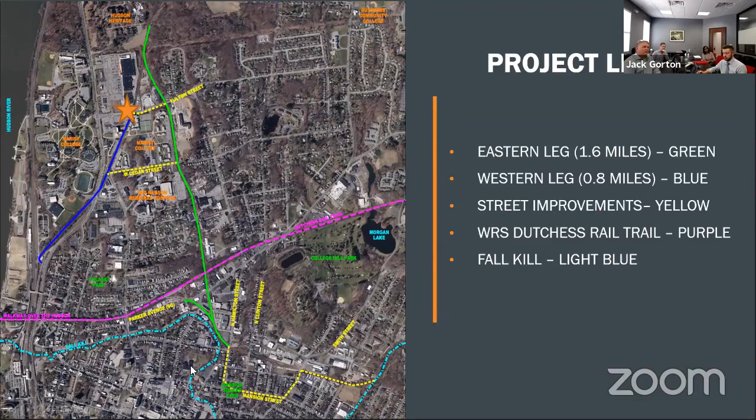To facilitate connectivity and create a more complete trail network, we're proposing on-street improvements along Fulton Street and Cedar Street, shown here with the dashed yellow lines. Lastly, we'll be installing wayfinding and ADA improvements throughout the northern portion of the city to direct users to the trail, also indicated with the yellow dashed line on the drawing.

As we expect this trail to be more than just a recreational facility, we anticipate heavy demand. In order to provide adequate space for potential users, we're proposing several robust trail cross sections. In the areas expected to have the most use, we're planning a split use trail — this top drawing here.

This will have distinct separated facilities for bicyclists and pedestrians, separated by a colored and/or textured median. The pedestrians will be accommodated on an 8-foot wide pedestrian pathway alongside a 10-foot wide bicycle path. The 4-foot median will be flush to provide opportunities for crossover between the paths and extra usable width, but will help define the pathways and also house the lighting mentioned earlier.

Where we expect demand to be less and we don't have adequate width available, we're planning a 16-foot wide shared use trail — that's this one in the middle. In this scenario, bicyclists and pedestrians will share the trail, similar to most trails found throughout the Hudson Valley. However, to accommodate the expected demand, this trail will be wider than most at 16 feet wide. The Dutchess Rail Trail, for reference, is 13 feet wide, so this is a nice wide section.

Lastly, we're proposing a roadside trail along West Cedar Street and Fulton Street. In this scenario, a 10-foot wide shared use trail will follow the roadway, offset from the road with a 5-foot grass buffer. The buffer will provide pedestrians and bicyclists separation from vehicles on the road, improving safety and comfort for trail users.

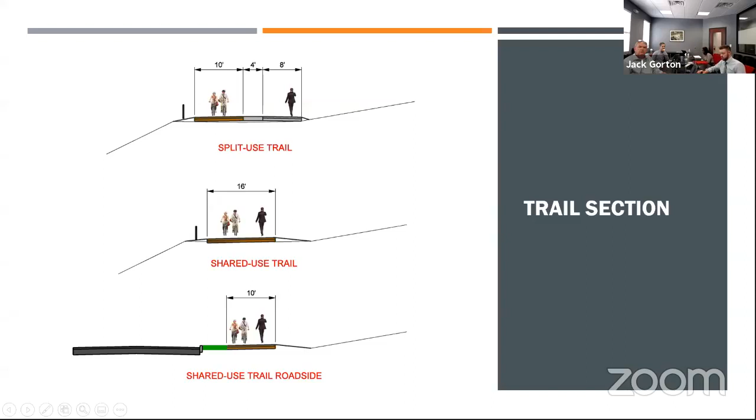This is a simple rendering of how the split use trail could look cutting through the Marist campus. Notice the distinct facilities for bicyclists and pedestrians, separated by this colored median. As noted earlier, the lighting will be accommodated in the median to adequately illuminate both facilities.

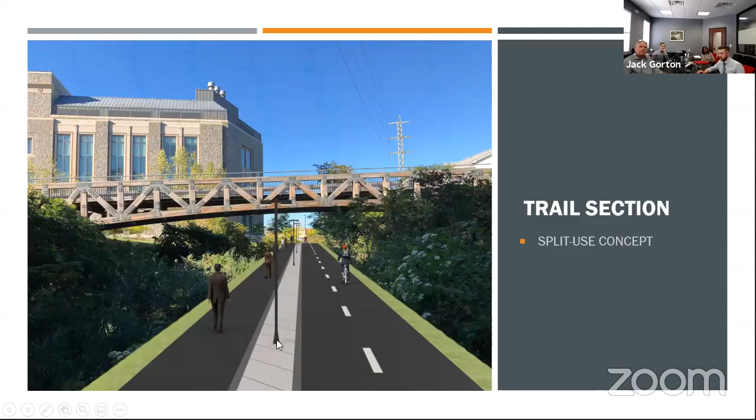The shared use trail section will look similar to the Dutchess Rail Trail, just with a wider asphalt section. A key distinction from the Dutchess Rail Trail is the lighting that will run next to the trail in the shoulder areas, as there will not be a median to house the lighting.

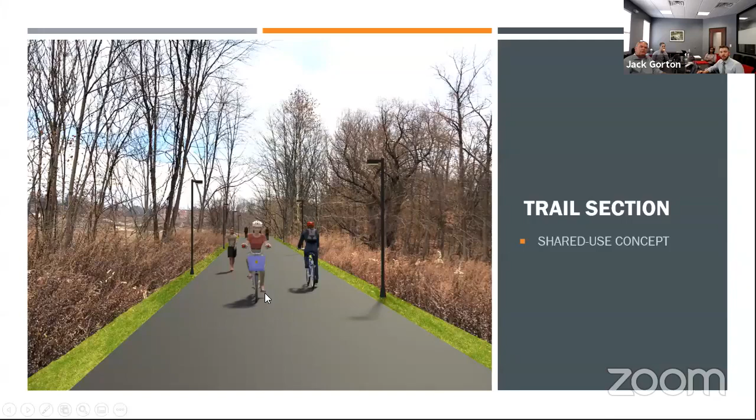One critical design element of all trail projects revolves around roadway crossings. This trail will create new conflict points between pedestrians, bicyclists, and motorists, as the corridor crosses several streets with varying characteristics. We'll be designing a crossing appropriate for each roadway depending on its characteristics. At a minimum, high visibility crosswalks and signage will be installed.

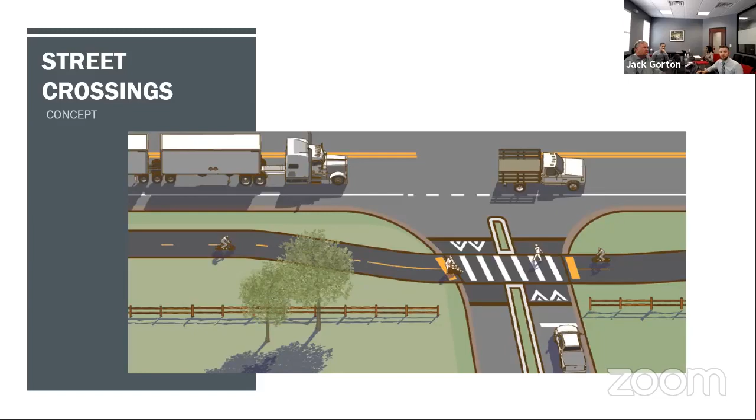These are examples of different crossings that have been implemented in different trails throughout the country. These techniques may be appropriate at different areas throughout the corridor.

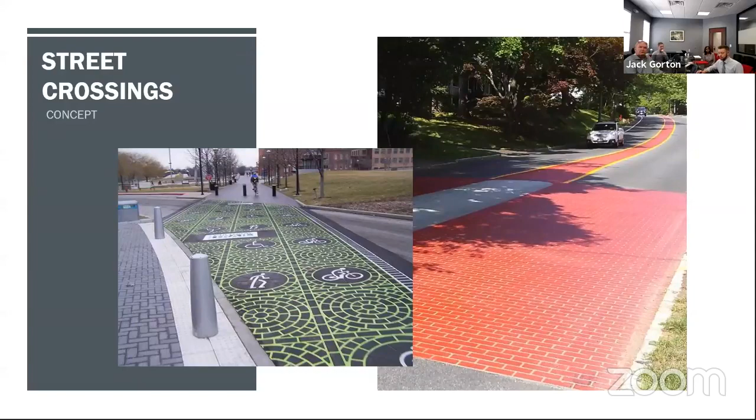One crossing in particular has been identified that warrants a grade separation, where the eastern leg crosses Fulton Street. Fulton Street carries over 10,000 vehicles per day, and with downhill grades, vehicles are often traveling at higher speeds. The eastern leg unfortunately crosses Fulton at a location with poor sight lines, so the trail is proposed to be ramped up and cross over Fulton Street via a bridge.

The bridge proposed for this crossing is the historic truss shown in this top photo. This is a bridge the county removed from one of their roadways over Metro North tracks in Dover several years ago. They have since been looking for an appropriate home for the historic structure and are proposing to install it here as an adaptive reuse. This render shows a simple graphic of what Fulton Street may look like with the bridge crossing overhead.

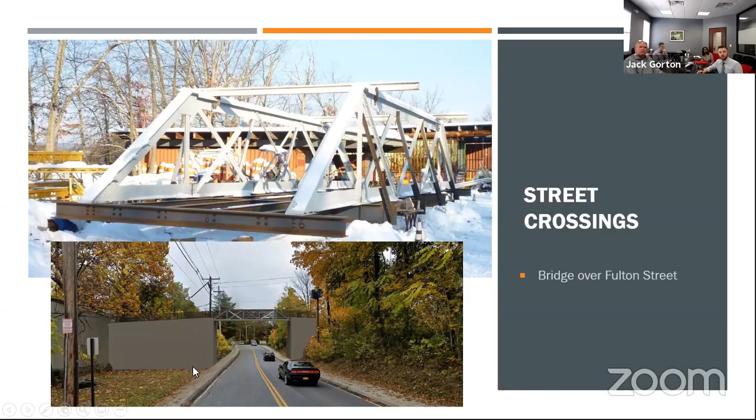Brendan mentioned our emergency response committee earlier. We have been working with emergency services to evaluate the use of cameras at strategic locations and ensuring that sufficient access points are installed.

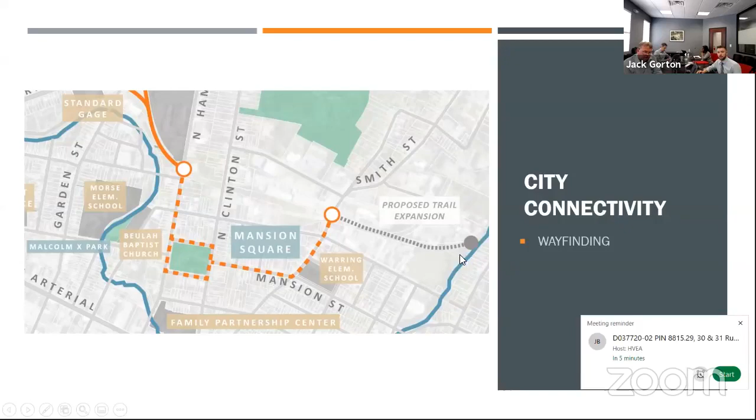The project will install wayfinding and ADA improvements in the northern portion of the city to route residents to the trail network through an accessible route. There's also potential for a future expansion to the east to connect to a potential trail along the Fallkill, if that's developed in the future.

Now I'd like to take a few minutes to walk through the corridor and highlight some key areas and connections. I'm going to start at the southern end of the trail at Hamilton Street and work my way north along the eastern leg to Hudson Heritage. I'll then circle back and we'll review the western leg starting at the north side of Fulton Street and head south towards Kittredge Place.

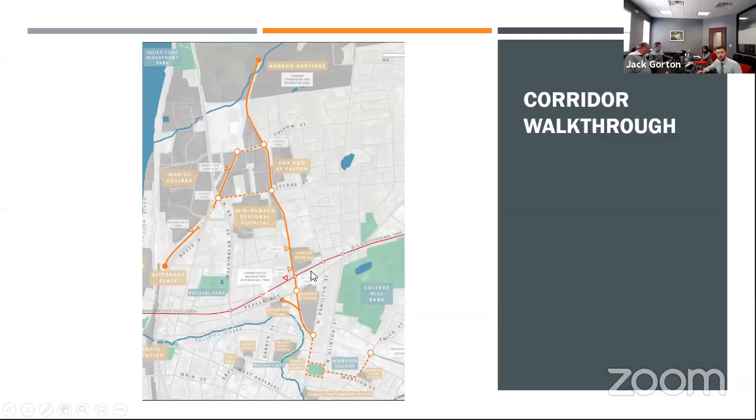The trail will begin here at North Hamilton Street, just south of the County Justice Center. This segment will be the split-use trail, indicated with the blue and yellow lines along the corridor.

Right at the beginning of the trail, we have a unique opportunity for green space and/or a pocket park, as the trail corridor directly abuts the Fallkill right here. So this area will be looked at to be enhanced for public space.

The trail then heads north past the Justice Center, where we encounter the Parker Avenue location. Parker Avenue is going to be a major decision point along the corridor. Here we are closely located to the Dutchess Rail Trail, the Walkway Over the Hudson, and a property that Scenic Hudson purchased and has plans to create community space.

The trail will take advantage of the development in this area and then create a spur that will head to the Walkway Over the Hudson and the community space that Scenic Hudson will be working on.

Parker Avenue will be improved through the installation of a flush median, similar to one of the photos I showed earlier. This will create a boulevard effect on Parker Avenue, slow vehicle speeds, and enhance safety for pedestrians and bicyclists crossing at two locations in the corridor.

The trail will then head north and cross underneath the Dutchess Rail Trail, which is carried by a bridge that crosses over this former rail line here. To provide direct access, an ADA-compliant ramp will be installed to the east to provide access to the Walkway Over the Hudson, and to provide access to points east.

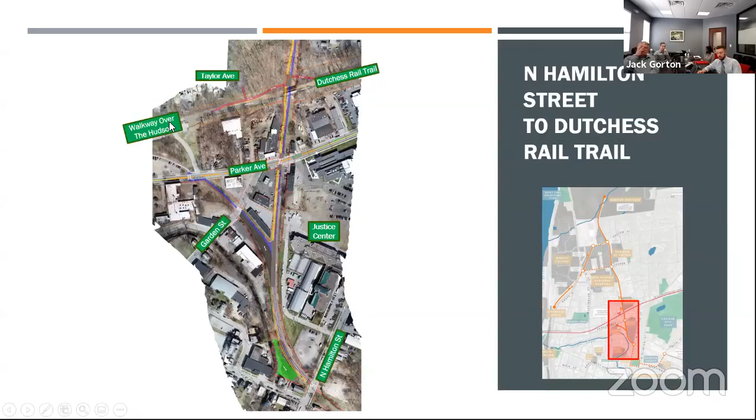As we head north of the Dutchess Rail Trail, the trail passes behind the Schatz Bearing facility and the former Schatz Bearing facilities. Similar to Taylor Avenue, we have the opportunity to create a direct connection to Clark Street for access for the residents in these neighborhoods.

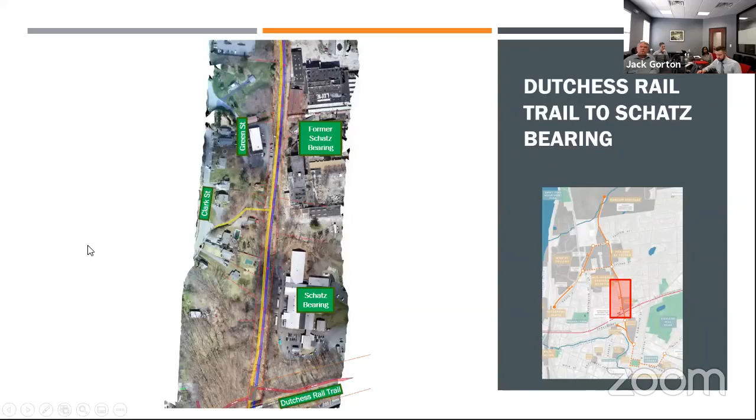Heading past Schatz, the trail will navigate behind the Mid-Hudson Regional Hospital, where we encounter Cedar Street. Cedar Street will be an at-grade crossing with appropriate signage and striping installed. There's a small gap of missing sidewalk on Cedar Street that will be completed or filled in to provide access from Fairview Avenue to the trail and to the hospital.

Heading north of Cedar Street, the trail will cut between the Marist Student Housing and the Fox Run Apartments. This is the area where we transition the trail from the split-use segment to the 16-foot-wide shared-use portion, indicated here in this blue line.

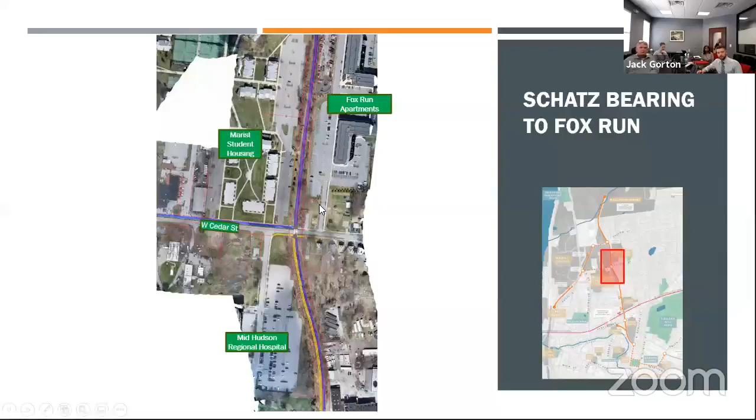Just north of Fox Run, the trail will cross Fulton Street. This is the crossing I showed earlier with the bridge. The trail will be ramped up and cross over Fulton Street, then ramp back down to the corridor.

To provide access, an ADA ramp will be constructed in the southwest quadrant, and a more direct staircase access will be constructed in the southeast quadrant.

There's a missing gap of sidewalk east of the trail corridor on Fulton Street that will be completed and filled in to provide direct, continuous access for the many neighborhoods east of the corridor to the trail here at Fulton Street.

The trail then heads north behind Home Depot Plaza to Hudson Heritage. A direct connection will be made to the new ShopRite and other commercial space in the Hudson Heritage development. Hudson Heritage will then continue the trail through their development to Route 9 and ultimately to Quiet Cove Park.

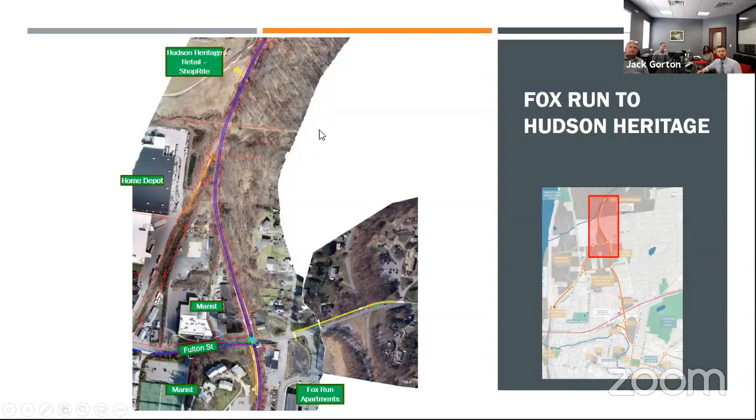I'm going to switch gears to the western leg. Just to reorient yourselves, this is the eastern leg between Cedar Street and Fulton Street that we previously reviewed. You can see here the on-road or roadside connections I spoke about earlier on Fulton Street and Cedar Street. These connections will provide direct access between the two legs to create a continuous network for trail users.

The western leg begins here at Fulton Street and heads southwest towards the Hudson River. This entire western leg will be the split-use trail section, indicated by the yellow and blue lines on the drawing. The trail will cross under Marist's beautiful pedestrian bridge, with a direct access route up to the Marist East Side sidewalk network to provide access for students.

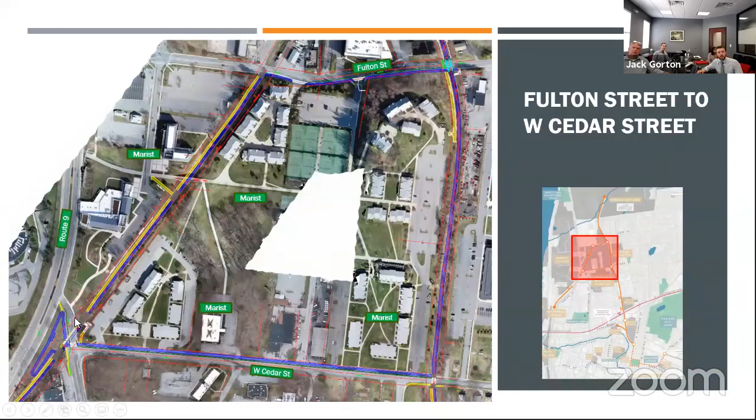We'll then head south and cross under North Road. At the North Road intersection, we will have an ADA compliant access path in this quadrant and a more direct staircase access in the northeast quadrant, providing access between the trail and the Cedar Street path.

Heading further south, the trail will cross under Route 9 and behind the McCann Arena. Similar to other points of interest, we are proposing a direct ramp to the McCann Arena and also a staircase for more direct access. The trail then heads slightly further south where it terminates at Kittredge Place, adjacent to the Metro North and Amtrak tracks.

We have sufficient space here to construct a small trailhead parking lot, depicted here in gray. A small segment of sidewalk will be filled in to provide direct access to the sidewalk network on Kittredge Place, which ultimately heads to the Hoffman Street Bridge and directly ties into the waterfront and the train station.

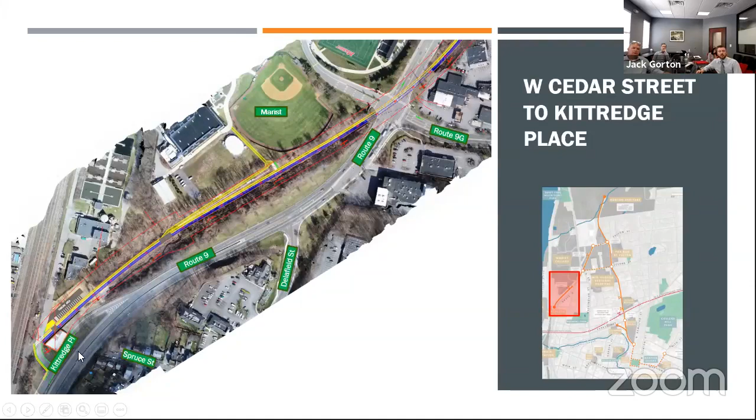The project is planned to be phased and built in segments. The current thought is to build the eastern leg from Parker Avenue to Hudson Heritage first. The western leg and roadway connections would follow. We'll be using this summer to progress preliminary plans and engage with the public. Final plans and details will be worked on in the later part of the year, with the goal of beginning some construction in early '22.

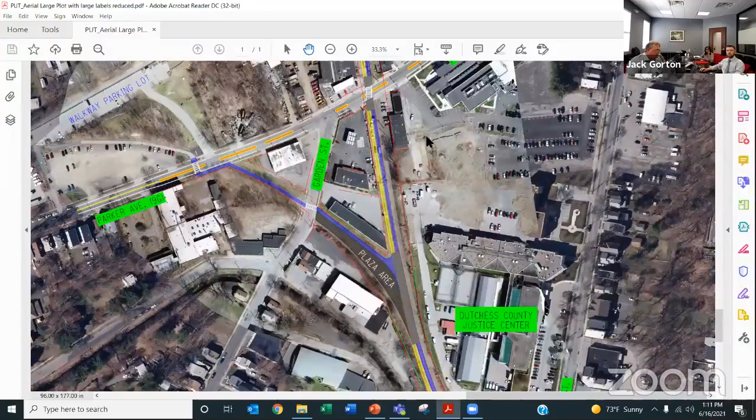Sure, on the connection to the hospital, as you saw in Jack's presentation, we did extend the sidewalk network. The trail butts to a back parking area of the hospital, and it really makes the most sense for the connection to be right there at West Cedar with a little extension of sidewalk. I think we're going to zoom in on it so you can see. But it provides a pretty direct connection.

In reference to the redevelopment of the Schatz property, certainly if that does happen, if even this helps spur that, or either way it goes, there are some great opportunities there to benefit the trail. So that would be an exciting thing if it does happen.

At this time, I don't see any additional questions, so I'll turn it back over to the county executive and the design team to bring us to closure.

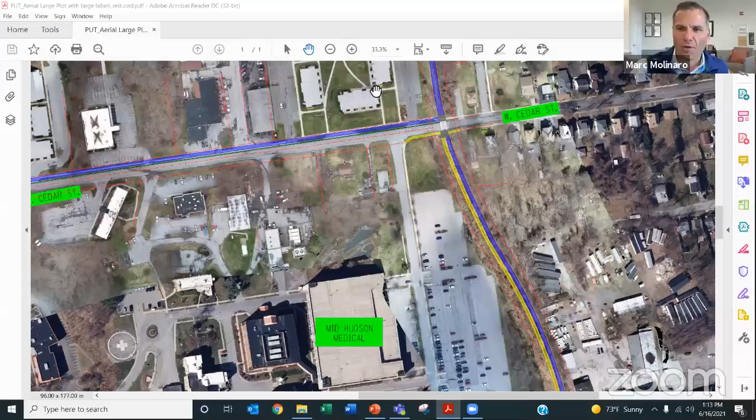Does anyone from the design team want to offer any additional comments? Perhaps just reinforce ways the public can continue to give input, and anything else you wanted to offer? Can we put the contact info back up?

Sure. There is one additional question, as you're loading that information, about landscape design, in particular around the use of native and drought tolerant vegetation, and also the potential future value of the Greenway as a pollinator type of green space.

One Nature. Sure, Susan. Certainly landscaping is something we're looking to develop as green space. I think Jack mentioned the one by the Fallkill. We do have a One Nature landscape architect who's very much into native plants, from Beacon, on our design team. So when we get to the appropriate point, we haven't looked at that yet, but when we get to the appropriate point, he's going to be assessing the full length of the trail, and we're going to use different areas as opportunities to provide landscaping.

Let me say on behalf of the mayor of the city of Poughkeepsie, any effort to create little pollinator pockets is certainly something I know Poughkeepsie would embrace.